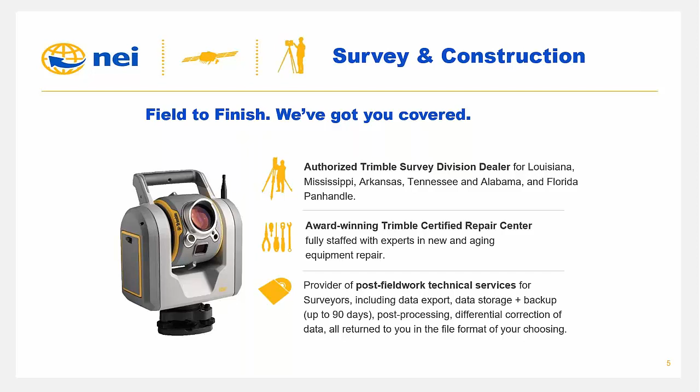So NEI does a lot more than most people are aware of. These next few slides are going to talk a little bit about that. One of our first and probably most prominent solutions are the survey and construction line of products, as well as mapping and GIS. Again, one of the few authorized Trimble mapping and GIS dealers in the United States. Our territory includes Louisiana, Georgia, Mississippi, Alabama, Arkansas, and Florida.

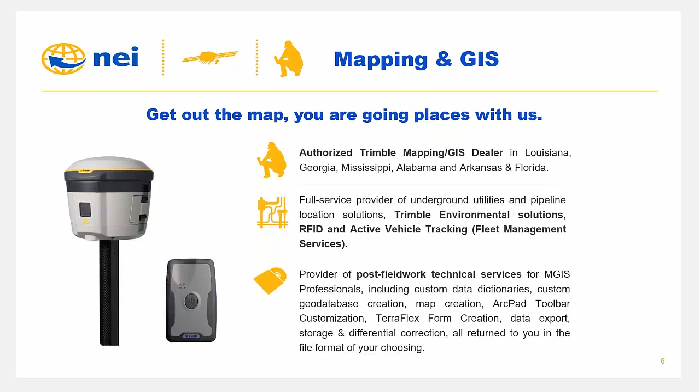We're also one of the advanced technology dealers with things like UAS that we're going to talk about today, as well as land mobile systems, the MX2, MX7, and now MX9 mobile imaging systems. We're also a Trimble Marine dealer, authorized again in those same states, offering some of the most advanced marine navigation solutions available.

NEI manufacturing includes both cables and cases. We have a unique facility in place to create and customize cables and cases for just about any need you may have. Fleet management solutions as well. NEI is one of the authorized resellers of the Trimble Field Service Management Solution, which includes the Trimble Locate to Protect device management system.

Also, rentals and used equipment. Try it before you buy it with a 1 week free rental policy. Check out other used equipment on our eBay store for rock bottom deals on gently used, pre-loved total stations, data collectors, Pelican cases, and much, much more. Finally, field supplies, from stakes to paint safety gear, we've got you covered.

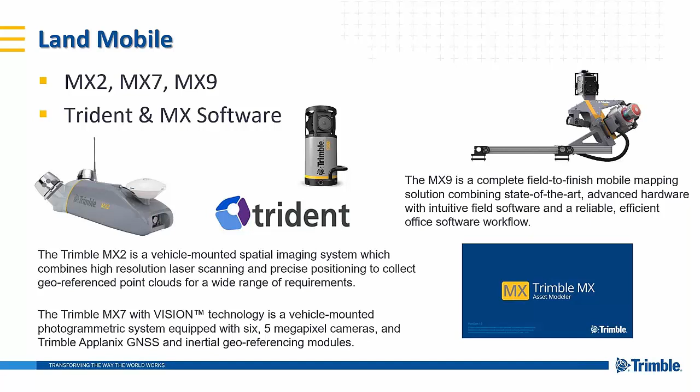The indoor solutions include the Trimble Indoor Mobile Mapping System, affectionately known as TIMS, comprised of a mobile scanning unit from Faro and an Applanix IMU, along with the imaging system. The land mobile systems now include both the MX2, MX7, and the brand new MX9, a complete field-to-finish mobile mapping solution combining state-of-the-art advanced hardware with intuitive field software, a reliable, efficient office software workflow.

And most of all, what we're going to talk about today, unmanned aircraft systems, both fixed-wing and rotary. Our fixed-wing solutions are now from Delair, including the UX5, UX5 HP, UX5 AG or multispectral, and the brand new UX11. We're also going to talk about specifically today Microdrones MD solutions, again the MD Mapper, MD LiDAR, and MD Detector.

So, before we get started, a poll question. Our first poll question is about just what UAS solutions are out there. If you would take just a moment and respond, are you currently using a UAS solution today?

All right, looks like we just about got all of the votes in, and we'll go ahead and share these results. So it looks like the majority are using a rotary aircraft solution, and then a lot of you, 43%, are not yet using a solution today. So we'll take this information and continue forward with our presentation.

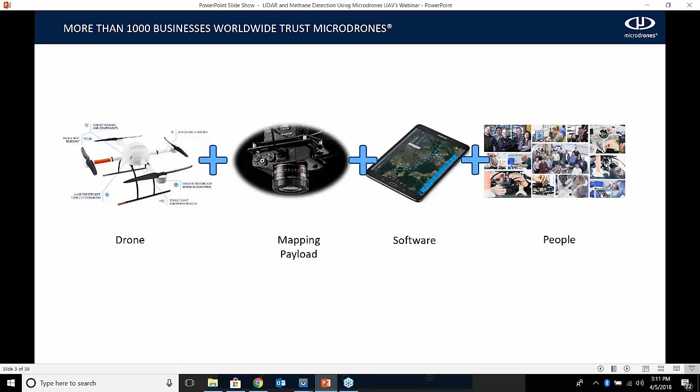We have offices in the U.S. in Rome, New York, on the old Griffiss Air Force Base, which is one of 6 FAA test sites in the U.S. for unmanned aircraft. Our MD Solutions is located in Montreal, and all our drones are manufactured in Germany. They manufacture the airframes in Germany and send them to Montreal, where they integrate the latest and greatest payloads into our existing airframes. We've got almost 100 employees now and some of the brightest minds in the industry, and we're always looking to partner with new companies and stay on the leading edge of technology.

Going into our airframes, this is the MD4-1000, which we'll be spending most of our time on. What does German engineering really mean? The MD4-1000 has been flying for about 10 years now. As new technology comes about, we don't build a whole new airframe around our new payloads. We integrate new technology into the existing airframe to keep you flying for many years. The airframe is meant to grow with your company. As new technology comes out, you can add a new portion to your business. There's about 7 or 8 different payloads now available for the MD4-1000. It's the workhorse of our UASs.

It can fly in extreme conditions, rain up to a 45-degree angle. So if you're finishing a mission, you don't need to worry about the drone getting caught in the rain. You can finish that mission and land it. You want to make sure you keep your payload out of the elements. It flies in a plus formation, which is another unique feature of our drones. It's a little harder to accomplish, but it keeps the drone more stable in flight versus the X-copters you see more frequently out there.

Our motors are rated for 10,000 hours, so we don't really have a maintenance protocol for our airframe. You always want to check and make sure there are no chipped props. But as for the motors, we haven't had anybody come close to reaching 10,000 hours yet. Hopefully one day somebody will, so we can continue to show our customers the quality of our products.

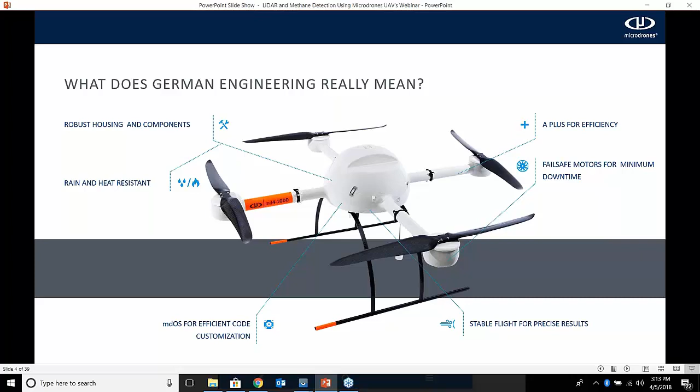This is our lineup of UASs. It all started with the one on the left, the MD4-200. It's strictly a nadir mapping UAS with about a 25-minute flight time. It'll map with a 20-megapixel camera, as well as a thermal camera and a MicaSense multispectral.

The one in the middle is our latest drone, introduced last year. It's our heavy lifter, the MD4-3000. It can carry a payload up to 13 pounds. One unique feature is it's shaped like an airfoil, so when it's flying forward, it produces lift to put less strain on the motors and increase flight time. The one on the right is our MD4-1000, our workhorse. It's meant to do everything for your company, from mapping to methane gas inspection to structural inspections. With that, we're going to start with our first topic of the day, the MD LiDAR 1000.

What LiDAR is, it stands for light detection and ranging. And when flying airborne LiDAR, that consists of three things: an INS, inertial navigation system, paired with a high precision GPS, as well as the laser sensor. So when you have the IMU or the INS paired with the GPS, it turns to be direct georeferencing. So what direct georeferencing is, I guess the easiest way to explain it is in photogrammetry.

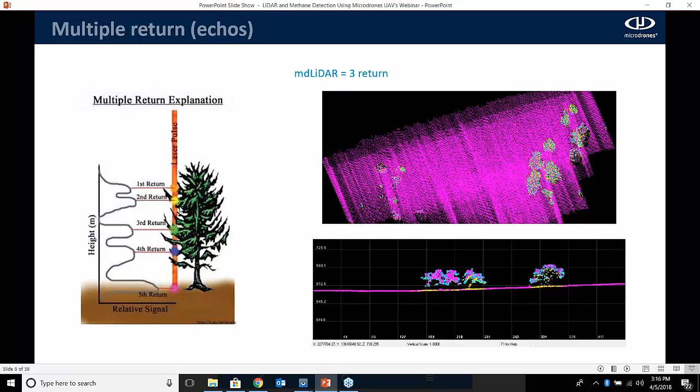Also, when flying, another benefit to LiDAR is the intensity of returns. So as you can see on the left, the high contrast from the Griffiss runway, you can see the striping in all the lanes and everything on the runway. This helps when classifying the point cloud. So the more intense the return, the softwares are usually able to pick out the different areas from it and classify that data, such as power lines and roads and edge of curb and all that good stuff.

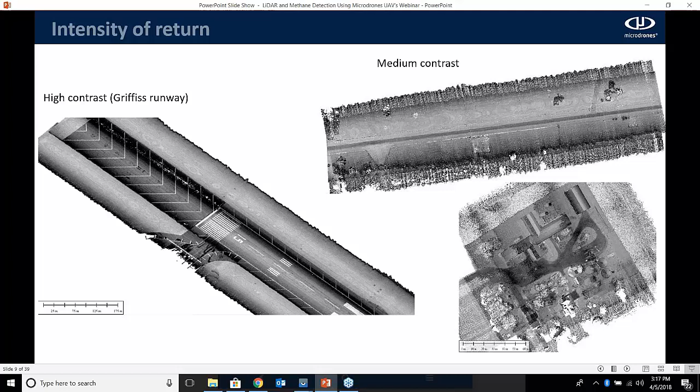I guess that might be a little bit more intense getting the edge of curb, but you understand, it's able to classify the power poles and all that good stuff in the software with the types of returns you get from the LiDAR. So getting into the actual drone itself, our solution is the MD LiDAR 1000. It consists of an MD4 1000 plus the SICK LiDAR sensor, which is manufactured in Germany, paired with the Trimble APX15 IMU, and then an industrial camera for point cloud colorization.

So this payload flies on the same MD4 1000 that you could be flying the methane gas detector or a base camera for photogrammetry. It's a simple installation. It's a quick turn of the wrist. It interlocks onto the drone with a simple 45-degree turn of the wrist under the drone. It's powered by the drone, and it also includes a carrying case.

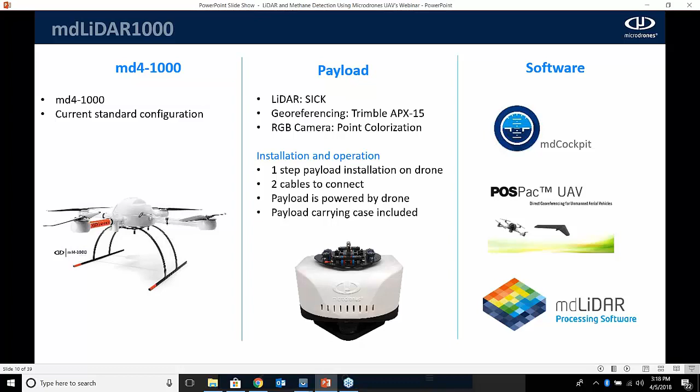The software that's included with it is mdCockpit for mission planning, as well as POSPac UAV, which is the Trimble Applanix program to get your exterior orientation or your direct georeferencing data from the drone, as well as the mdLiDAR processing software. So what we provide with this unit is everything up to the georeferenced point cloud. From there, you can take the LAS file that we produce from our MD LiDAR software into the software suite of your choice for your point cloud classification and actually producing the deliverable.

It's an easy end-to-end workflow, I guess I kind of just went through. It's simple mission planning, and I'll do a demo of mdCockpit here in a second. So inputting your point density based on what you're looking to get in your deliverable. It's a fully automated mission. Once you take off, you throw it into waypoint mode, and the drone takes care of the flight for you. Georeferencing is done in POSPac UAV, and then the final point cloud is produced in the MD LiDAR app.

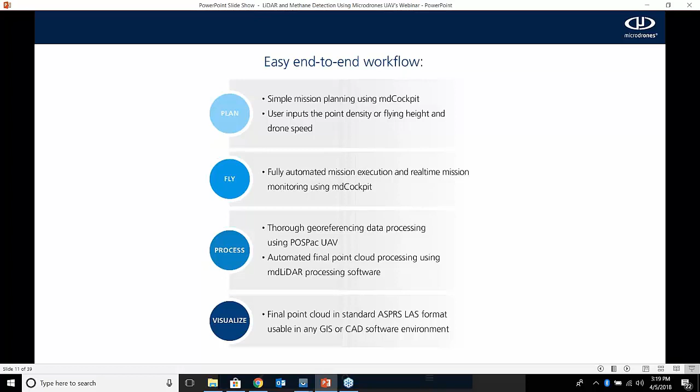You can input your flight height, your drone speed, and the overlap all in here in order to achieve the point density you're looking for, and it also gives you the flight plan results. So with that being said, I'll open up mdCockpit here on PC so you guys can see it. So this is my neighborhood here, and I'll go in and build a mission for you guys so you can see what I'm doing.

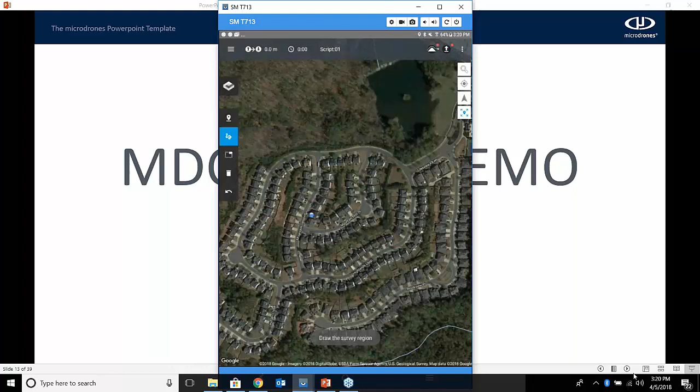First thing I would do when I hop in here is select which payload I'm flying. So in this case, I'm going to be flying the MD LiDAR. I select that. I come in here and I want to draw a survey polygon. So I'm going to go around this portion of the neighborhood. And I'm going to tell it which sensor I'm flying. So I'm flying the SICK LiDAR. I can change my hatch angle in order to optimize my flight. I'm going to keep it at 60% overlap, and I'll fly it at 50 meters.

I'll need to make my alignment waypoint. So I'll put one here, alignment waypoint. And then I'll drag one in front. So in there, they're going to fly in the same direction at that speed.

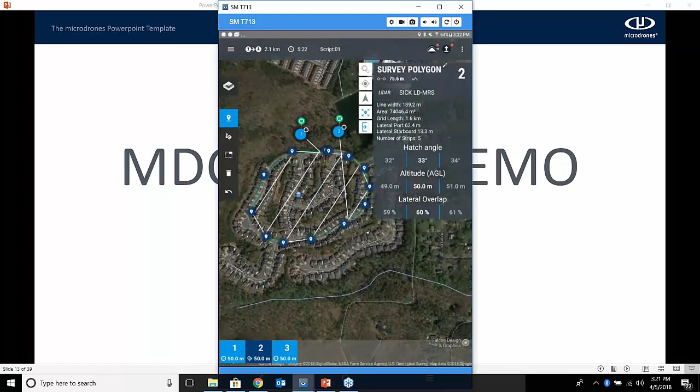After I'd be done here, I could go and save the mission, but also we just released, if you see up here, this is called the terrain following. So in order to keep a constant GSD when you're flying photogrammetry, or a constant height over the terrain, the drone will actually follow the terrain and stay 50 meters over the ground the entire time to keep that same swath width from the laser, as well as keep the same point density because you'll be staying at the same height over the terrain throughout the flight.

It utilizes Google Maps in this case. We can actually also utilize the more robust PC version of mdCockpit, and if you needed to upload an existing DEM, we can actually follow that. Like if you have new elevations of a site you're working, you can follow that terrain if you needed to be that precise as well.

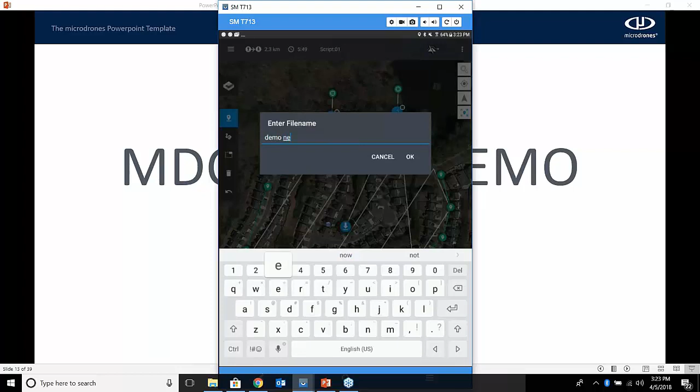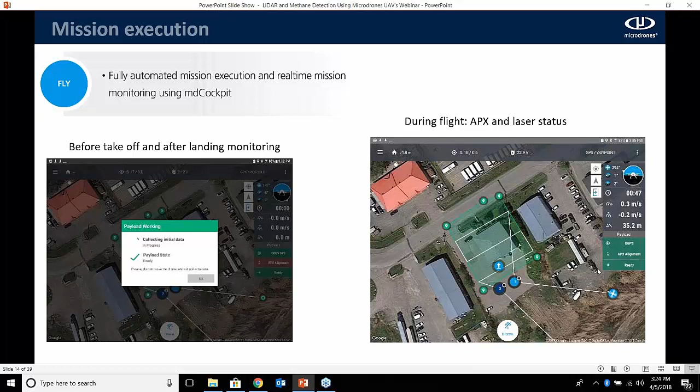You didn't have your IMU working properly or whatnot. So it's kind of all fail-safes before you actually fly, to make you feel good while you're flying the mission that you're going to get data.

This is the screenshot of the mdLiDAR processing software. So after you get your exterior orientation from POSPac, your lat, long and altitude, or your northing, easting, and elevation, and then your exterior orientation of how your drone was oriented while you're scanning, your Omega Phi Kappa, you bring that into our mdLiDAR processing software, where we marry that with the LAS file from the flight from the drone.

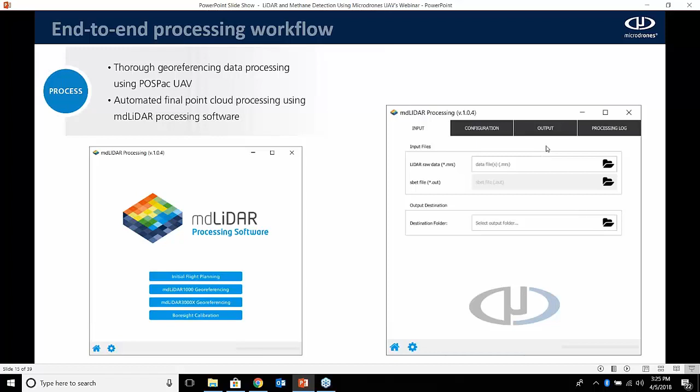In the configuration tab, you're going to set your boresight angles, and we'll get into that here in a second, as well as your output coordinate system that you'd like your data to be in. And it marries everything together and produces your georeferenced point cloud, all done in software that we've produced.

The absolute accuracy of the system is about 6 centimeters in the X, Y, and Z. This is all done on testing when we were on Griffiss Air Force Base. We had 56 GCPs set out using a total station by a professional surveyor in New York that we have flown many times, and we're really conservative with our accuracy. This was flown at 40 meters at 3 meters a second to get that point density.

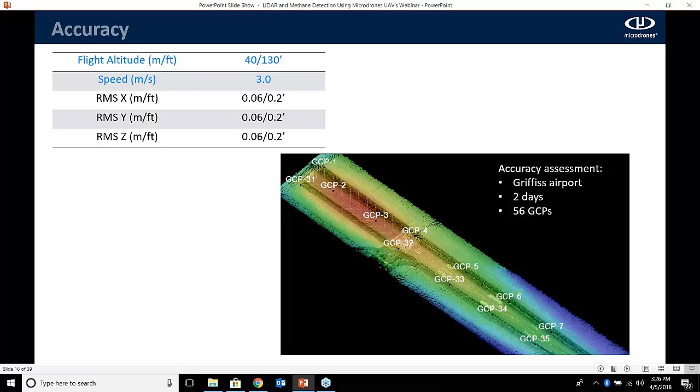But typically, you're usually seeing 1.5 to 2 tenths on all your Z elevations for the most part, and a lot of times it can actually be much tighter depending on the speed and the point density you got. This is a sample data set from a farm site we fly a lot in Ontario, just to kind of give you an idea what the data would look like from this LiDAR.

And then I keep talking about point density. This is a graph that's actually inside the mdLiDAR software to give you an idea for planning your flight, what kind of point density you're looking to achieve, what flight speed you'll have to fly at, and height. So typically our sweet spot that we found is about 40 meters at 4 meters a second. It gives 60 to 70 points per square meter. It also can cover the most area efficiently.

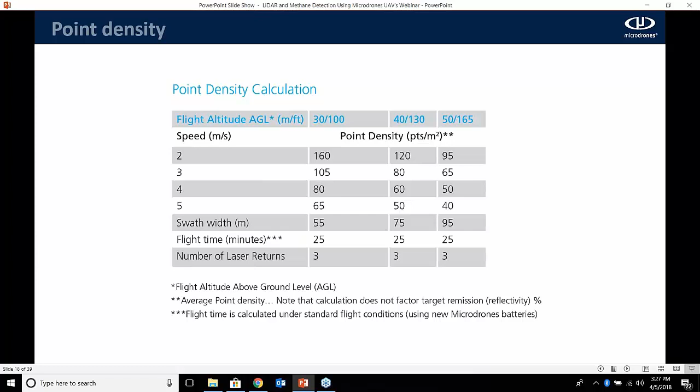It's got about a 25-minute flight time with our md4-1000 with the LiDAR. We usually get up to about 45 minutes with the photogrammetry payloads, but the LiDAR's a little bit heavier. So it's meant to make the 1000 a little bit more versatile. So the flight time is diminished a little bit on this, but you still can cover about 50 acres of flight with the mdLiDAR1000.

The boresight calibration, what I mentioned earlier. So in-house, we write our own algorithms for calculating the boresight calibration. The boresight calibration is the angles and the distances from the GNSS to the IMU. So without a properly calibrated laser or LiDAR system, you might have a lot of noise. Like in the top photo, you'll have multiple lines, and you can't actually get very tight data. So without calibrating your sensor you would get data like at the top. After you do have the proper boresight calibration, you can get all your lines married together and everything looks clean, not noisy.

So many other manufacturers have to send their sensors back to the manufacturer that actually makes the laser sensor to get these boresight calibrations, whereas we have the knowledge and the wherewithal to do this in-house. And if you have a problem, you come to Microdrones versus having to go to 7 or 8 different hands in the fire. Every payload is sent with the mdLiDAR calibration report, as you see here.

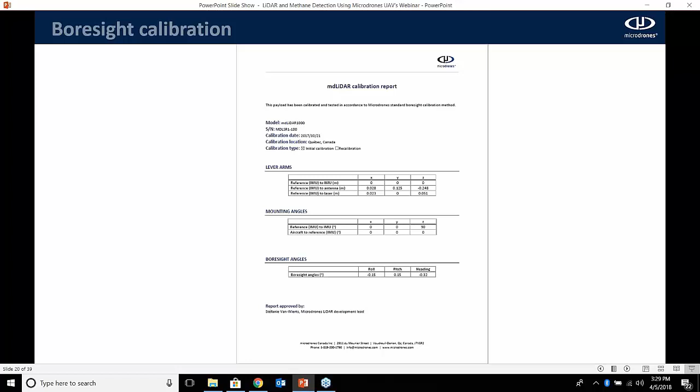You get your lever arms and your mounting angles and your boresight angles, and this is all inputted into the mdLiDAR processing software. And you don't have to continue to edit every now and then. It saves it in there. So when you actually bring in the data from the drone, you're able to continue to process in that streamlined workflow and get quality data sets every time.

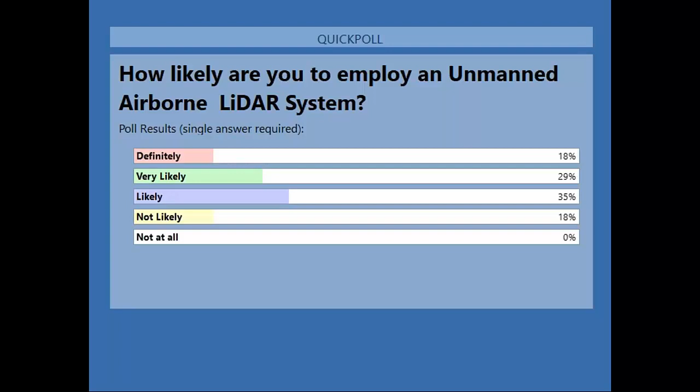All right, we'll go ahead and close that out and share the results with everyone. It looks like about 35% are likely, 29% very likely, 18% are definitely interested. Thanks everyone for participating, and we'll turn it back to you, Matt.

Good deal. Well, now we'll get into the mdTector1000 CH4. This is also one of our latest payloads. We introduced it at Commercial UAV last October. Who should consider using the mdTector1000 CH4? Professionals or companies responsible for inspecting gas, methane infrastructure, tank inspections, landfill emission monitoring, gas well testing, as well as natural gas line surveys.

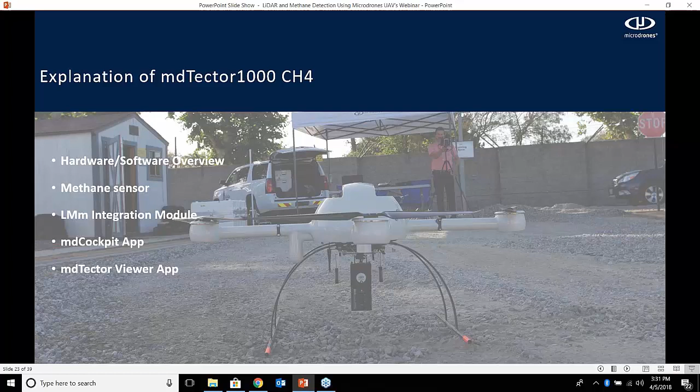What we'll get into in this presentation is the explanation of the mdTector1000 CH4, the hardware and software overview, as well as the methane sensor, the integration module, and then both the apps that go along with it: the same mdCockpit app we just went over, as well as the mdTector Viewer app, which allows you to see the data in the field.

So what's included in the mdTector CH4? Obviously you're going to be flying it under the same drone, the md4-1000. The payload is the PerGam LMM Gen 2 sensor. The integration module includes the sensor as well as the stabilized nadir mount that you see down here in the bottom right, and an FPV camera so you can see what you're monitoring in real time from the drone, as well as the HD video link for viewing that sensor. Software included is the mdCockpit Android app, and then the mdTector Viewer app, which allows you to see the data in the field post-flight.

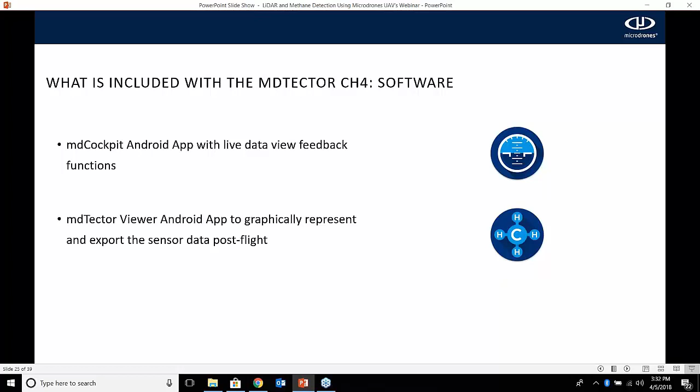So some specs on the LMM, the Laser Methane Mini gas sensor. It's specifically manufactured to sense methane gas. It's an extremely sensitive sensor, from 1 to 50,000 parts per million per meter, and it measures at 10 hertz, so 10 readings a second, and has an operating distance of about 100 feet. So when you're flying over a pipeline, typically 50 to 75 feet over the pipeline is kind of the wheelhouse that we stay in. The operating temperature range is from 1 to 122 degrees Fahrenheit. And it uses an infrared laser in order to sense the gas.

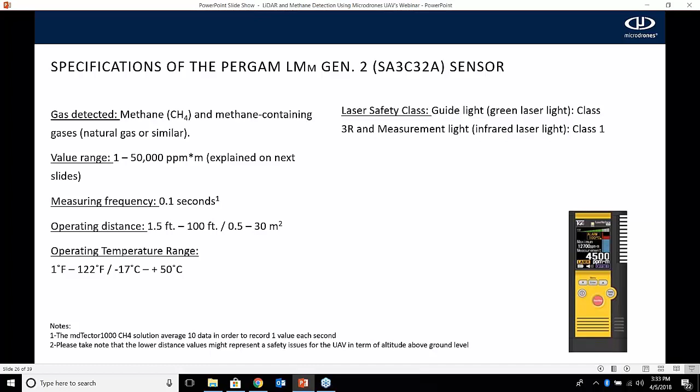So how this works is if there's methane gas in the area, the infrared laser is partially absorbed by the methane, and the sensor uses an algorithm to figure out how many parts per million of gas was in the area and able to absorb the laser, and it shows you that in real time on the tablet from the sensor. It also has a green laser light for showing where the sensor is actually oriented at the moment.

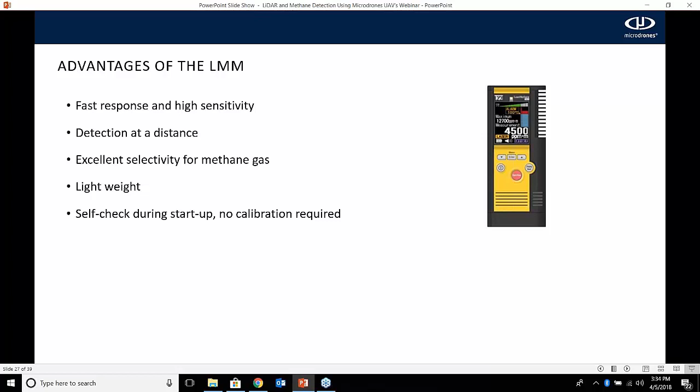Some advantages of the LMM: it's got fast response and high sensitivity, and it detects at a distance, so you don't have to get boots on the ground in order to go in areas that might be dangerous. It's obviously excellent for detecting methane gas. It's lightweight, and it does a self-check in the beginning, so no calibration is required before the flight.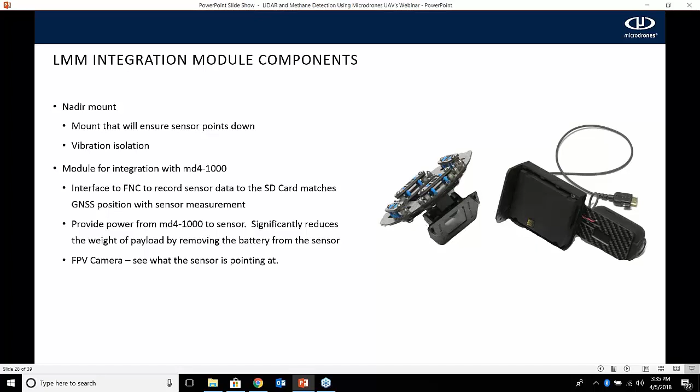The MD Cockpit Android app. So this is actually what you're going to see when you're flying the drone. The drone plots the readings behind it as it's moving forward, as well as lets you know how many parts per million of gas you're actually sensing at that moment. So you can see here the little donuts it's leaving behind. They're colored depending on how intense the readings are from the methane. The 11 right here is how many parts per million of methane gas is actually in the area, and then clear is just letting you know that the sensor is clear and functioning properly.

So once you land the drone, you get a reading. This was flown over a well site. You'd get the same type of readout if you're flying over a pipeline or whatnot, but this was flown in a grid formation. So what you can see is this is down.

Once you land the drone, you download the thin flight data, or TFD, from the drone via Bluetooth onto the tablet in our mdTector Viewer app. From here, you'll be able to see the different readings it was able to get while it was flying.

The yellow donuts are anything from 100 to 500 parts per million, and the red donuts are anything 500 parts per million and above. The clear was anything from 0 to 100 parts per million of gas.

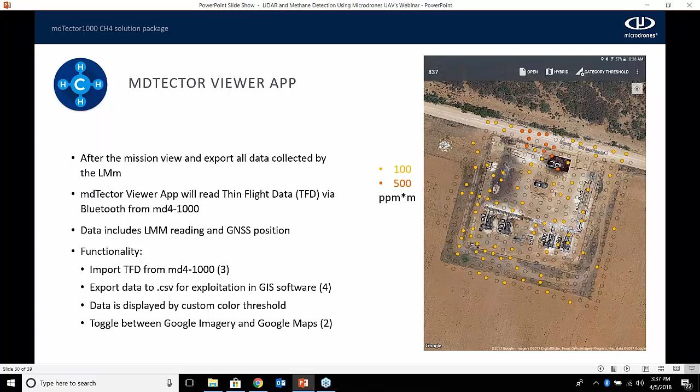What you can do in the app is actually change those tolerances to narrow down exactly where the leak is coming from. So from here, we can go to the next slide.

From here, they changed anything from 0 to 200 parts per million to leave as clear. Anything from 200 to 500 parts per million would be yellow, and anything 500 and greater would be red. So you can see that as the intensity changed, you can see exactly where the most intense methane leak is coming from.

Then you change it one more time: 0 to 250 is clear, 250 up to 2000 is yellow, and anything greater than 2000 is red, to actually find exactly where those leaks are coming from. So you can actually make a repair in the field.

Once you're done with the app in the field, you can actually download all that data as a CSV and export it out and use it in your GIS software, such as Trimble Business Center or any other software.

In the CSV, it gives you the lat, long, and altitude of the drone, as well as the intensity of the methane leak or methane reading it got in that area.

So just to go back over the workflow: during the flight, you get live telemetry with live readings from the sensor, as well as the monitor set up to view the FPV camera from the drone. Post-flight, once you land, you download the TFD from the drone, view the data in the field on the mdTector Viewer app, and then export it out as a CSV for the people in the office to manipulate the data.

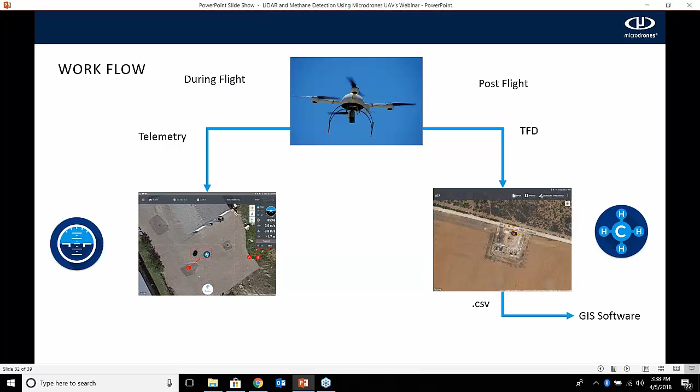The great thing about this sensor is it isn't a one-trick pony. It's not strictly stuck on the drone. So once you finish your flight, say you flew a pipeline and found a couple of readings of leaks from the sensor in certain areas.

You can actually use the tablet to go back into those areas where leaks were found, and take the methane sensor off of the drone and use it on a pistol grip like it's normally used.

Typically we're using this methane gas sensor by walking a pipeline or walking an area and sweeping it with the pistol grip. It can be hours upon hours of walking in dangerous locations.

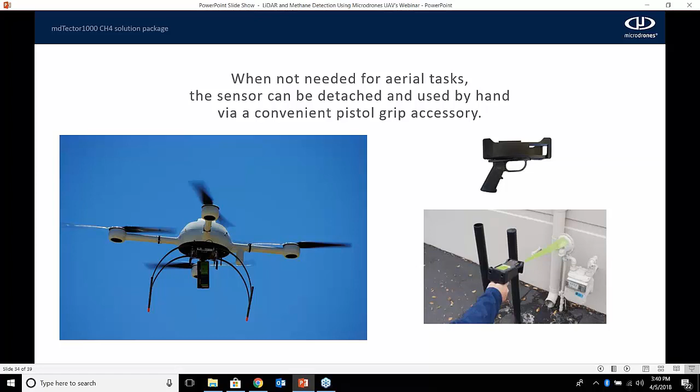So the drone can actually be deployed quickly and used in the air to find leaks over broad distances, then brought back down and used traditionally to find exactly where those leaks were coming from, and then get a repair team out in the field to repair those areas.

Some advantages of the MD integration with the LMM: we record all the data on the drone, so there's no external data collector needed. It also reduces weight and keeps the flight time high.

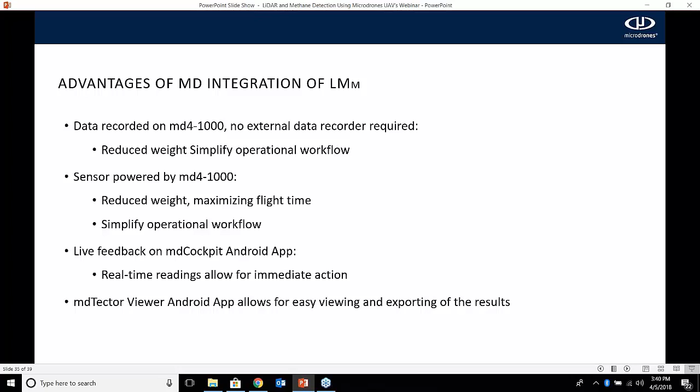The sensor is powered by the drone, like I stated, with the battery from the drone, so there's no external battery to add weight, and you get live feedback from the Android app. Exporting the results out is easy, done on the tablet as well.

Who we consider the mdTector CH4 clients: people looking to add another solution to their existing airframe. So say you're flying pipelines with the drone all the time, and you wanted to be able to add another service to your customers.

You can throw the mdTector CH4 simply on the drone and produce another deliverable for your customer that they're probably already doing in another way, like walking these pipelines or driving it with a four-wheeler.

You can improve and standardize maintenance services on your pipelines or well sites. It's great for natural disasters such as hurricanes. You can deploy it quickly. It improves the workflow and time spent in the field.

You can reduce the amount of people needed to inspect these areas in harsh conditions. Time is money, and you're definitely going to save a lot of time flying it with this sensor versus actually driving or walking pipelines in dangerous conditions. And it reduces the environmental impact of ground-based methods.

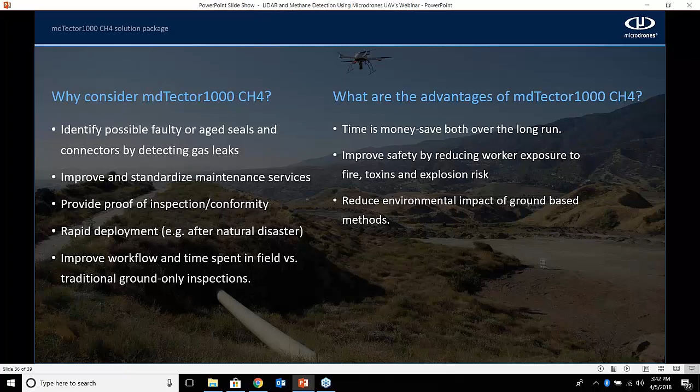You might not have to walk in areas that are sensitive to people disturbing, such as for wildlife and whatnot. You don't have to worry about that when you're flying above it all. So it's kind of just a mission to do - it just allows you to be more efficient versus traditional methods of walking in dangerous areas.

With that being said, we have a real-world user, one of our high-end users here in the United States at Raven Air. Mark Sakich and Ivan Hirschberger are here, and they're going to talk about their company. They're located in the northeastern part of the United States and have the mdTector CH4 as well as a mapping package that they utilize.

We're a company located in northwest Pennsylvania, but we cover the entire state - actually we're branching out, we haven't really set how far. We're a sister company to Two Track Drilling, which Ivan and his brother and their father started probably 15 to 20 years ago. They decided they liked the technology and wanted to branch out, and with the contacts they have in the gas industry, thought partnering with Microdrones was an avenue we wanted to pursue. I was in the gas industry for almost 20 years with the utility and worked with Ivan for a long time.

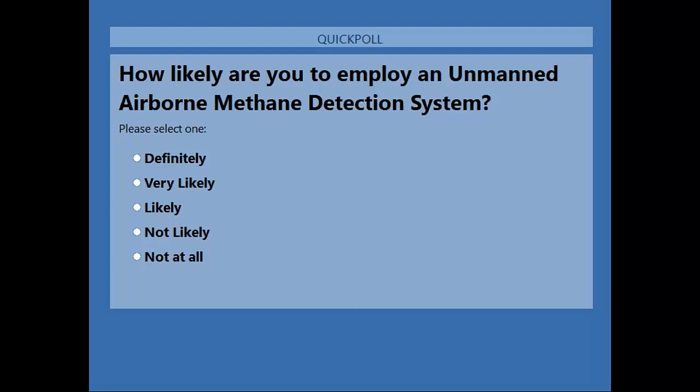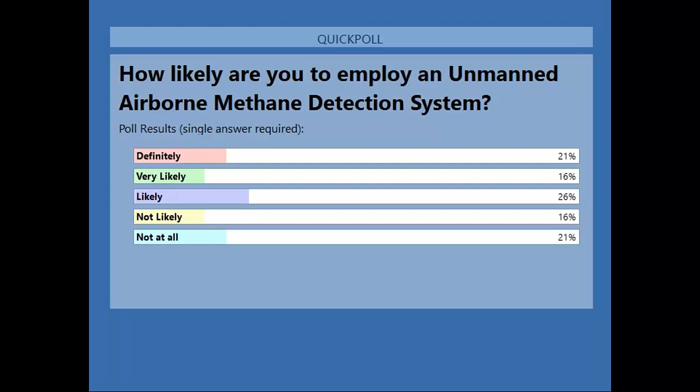All right, thank you everyone for your vote. We'll take a look at the results here. So it looks like the winner is likely at 26%, followed by a tie for definitely, and then some not at all.

All right, so question and answer time. If there's anything that's been covered today that you have a question about, now would be the time to go ahead and enter that question in your GoToWebinar control panel so we can answer it as these come in. One question we see already coming in, Matt, is: are the payload options for the md4-1000 all interchangeable?

Yes, absolutely. So we can switch from flying a photogrammetry payload to a LiDAR, to a methane gas sensor, to the multi-axis gimbal. It usually takes a couple minutes in the field. You might have to change a wire, unplug one and plug another in, depending on which payload you're flying, but it's usually done within 5 minutes. Once you get the hang of it, it's really simple. So yep, they're all from the 1000 — you have 7 or 8 different payloads you can change fairly quickly.

Okay, great, looks like one more question here. Can all the data be processed using the Trimble Business Center and UAS Master software workflow?

Yes. So when flying the LiDAR, you're going to actually produce the point cloud from the MD LiDAR processing app, which will produce your LAS file. Then you can simply drag and drop that into Trimble Business Center. Or if you're flying the md4-1000 for mapping packages like the DG or the base mapper, you can absolutely process those in UAS Master. It's my choice for actually processing photogrammetry data, as well as — here in the next month or so we're going to be releasing the ability to produce a JXL file from the MD4-1000, which will utilize the same workflow that the UX5 does, which a lot of people are used to in Trimble Business Center.